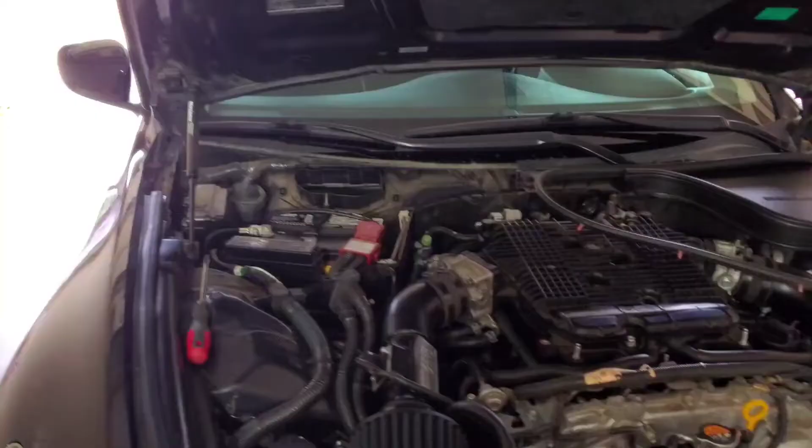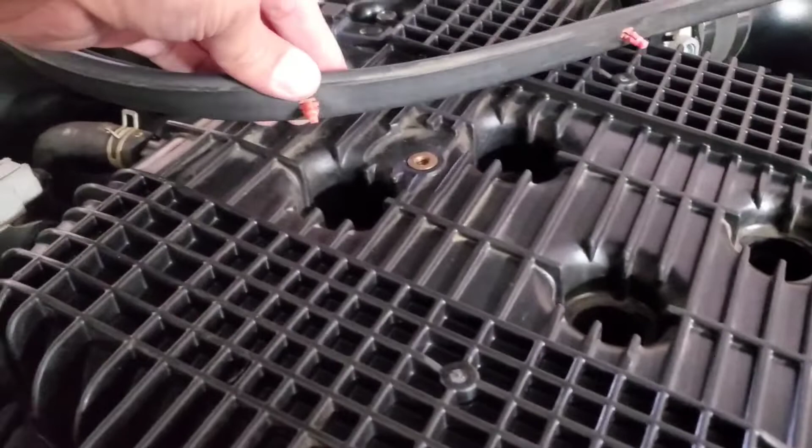All right, so basically I had to take this panel here off, right? And then the panel here that covers the battery. So this panel here that sits right over here over your cabin filter, it's held in by these clips. Just be a little careful when you take these out. They just come out one at a time. You can grab here and pull it out to get that off.

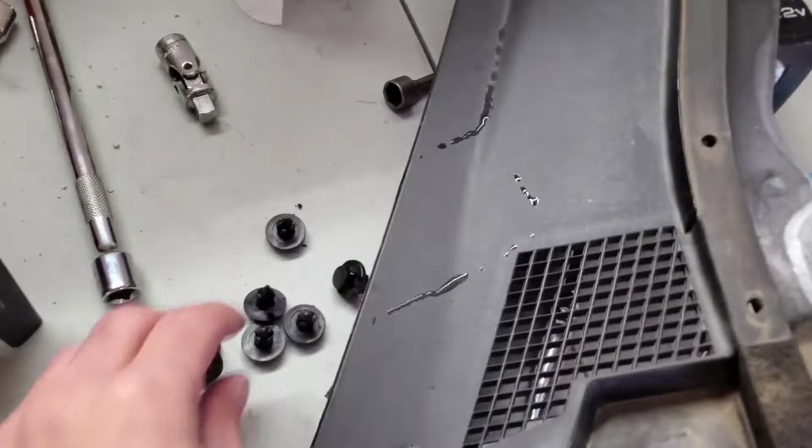And then that and the battery cover are held on by these fasteners. Real easy, just get a flathead under, pull them up, and then take them out. If you break any, no big deal, they're cheap. You can get a big bag like this on Amazon for like $5 or less.

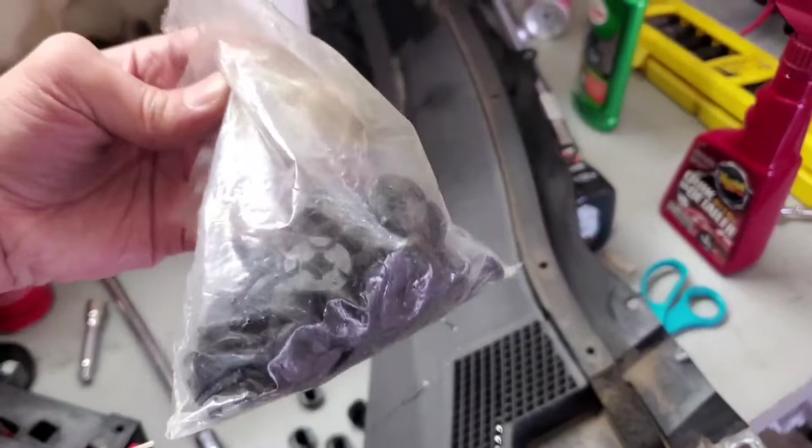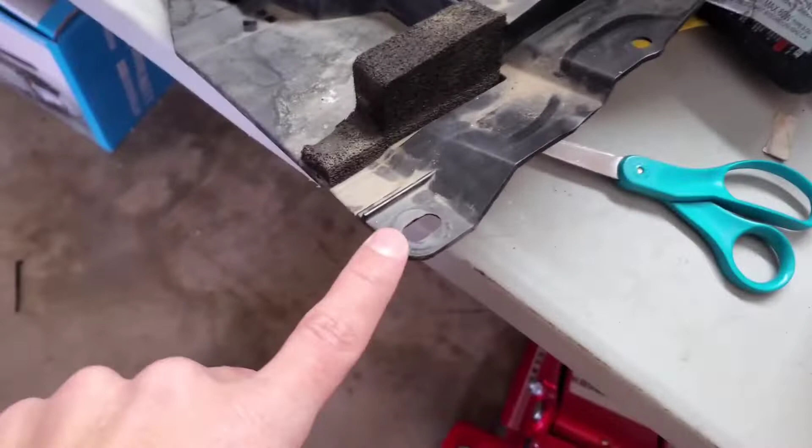So really handy stuff. So basically these are all the access points for that weather stripping that I just showed you, and then you've got a series of clip points where these clips go in. So you just pull them all out, and you can get that out, and then you can get the battery cover out as well in the same fashion.

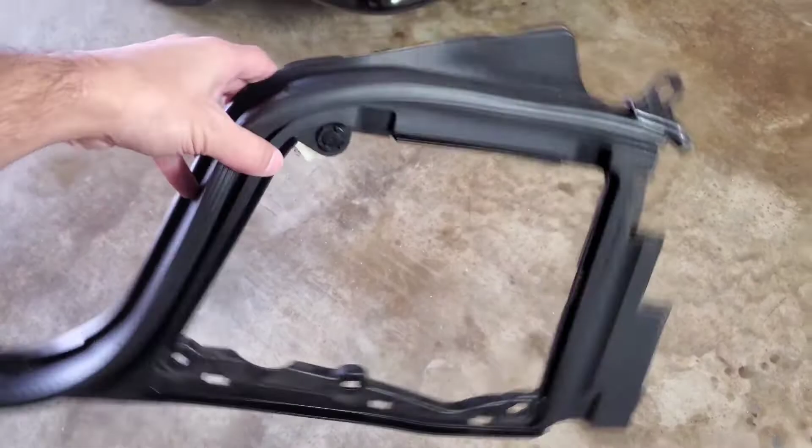No big deal. So once you're in the fuse box here, there are these 2 retainers, that guy and that guy, and it's sitting in here, and these retainers clip into these little squares. You press them down and pull it up. And once you do that, you can pull the fuse box out a little bit and get access to it. So I'm going to pull that out right now and remove the fuel pump fuse, and then we're going to drain the lines.

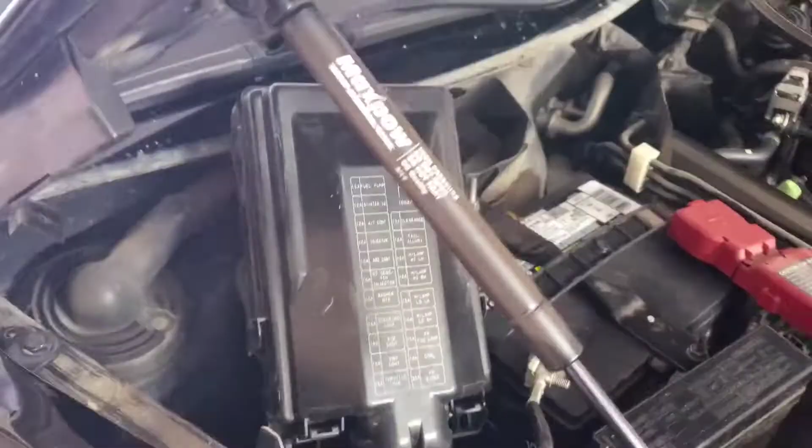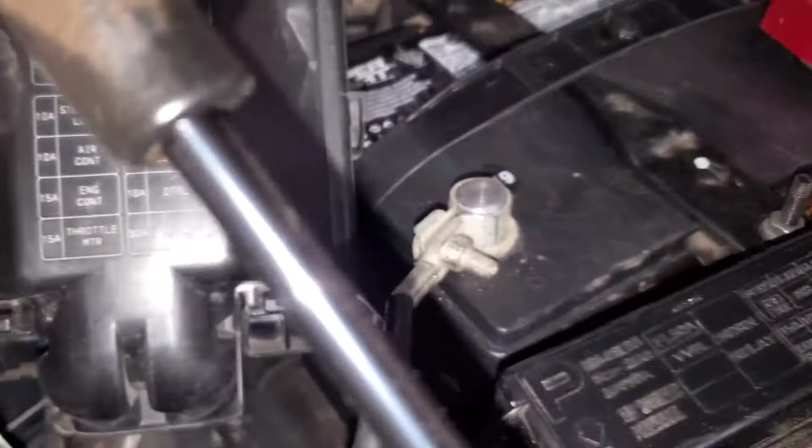Alright guys, so this box was a little difficult to get out. There's this wiring harness. I don't know if you can see it right there. That wiring harness right there basically is kind of tucked underneath this bracket here. So you just want to kind of finagle it out, and then you'll get access to your fuse box. There are 2 clips on the bottom, and then 1 clip up here on the top right there. So you want to get all of those off, and then you can pull this thing off.

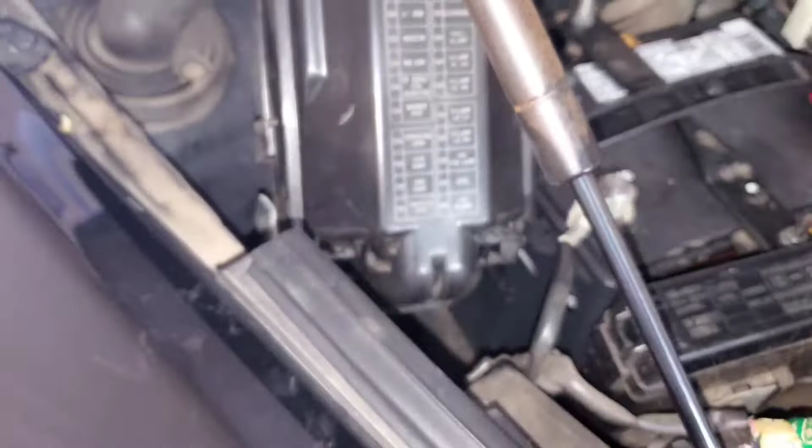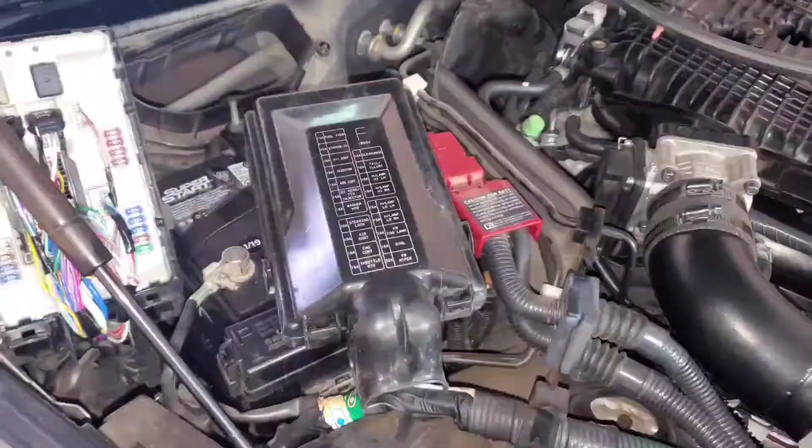So I'm going to go ahead and get that done right now, and then the fuse for the fuel pump is right there. Pretty easy spot, kind of a bitch to get to, but here we are. Alright, and there we go. We basically just pulled these 2 up, and then it came off that way. So there's no way you're going to get that done with this in the car. You might be able to, but not with the battery there. So I went ahead and did that.

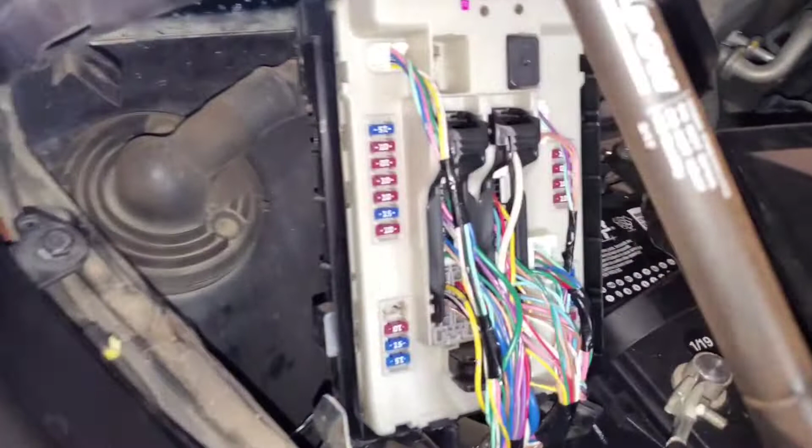And then the fuse we need to pull is this one. So I'm going to pull that, and then we're going to go try and start the car and kind of let the gas just run through the system without the fuel pump on. After that, we're going to remove the negative battery terminal and remove all power from the car so we can get access to the fuel pump. Alright, top fuse is out, and now we're going to attempt to start the car.

Alright, I think it's out. Yep, completely out of gas. So that's what we wanted. I'm basically gonna remove power now and push the car into the garage, get it situated, and it's just gonna be sitting here from here on out.

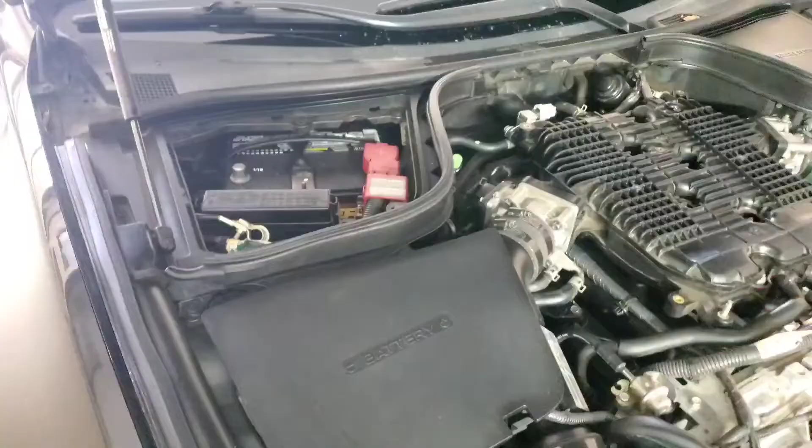So let's go ahead and get everything put back together, get the car rolled in, get the battery disconnected, and then I think we should be good to go. I shouldn't have any reason to access that fuse again from here on out. So I'm gonna get it in the garage, put it back together, and then yeah, 3, 2, 1, bam. All right. Battery's disconnected, everything's put back, we're good. We're gonna roll the car in now.

As you can tell, there's a lot of garage space to work with right now. We're gonna roll it in, and then I'm gonna work on getting that back seat out so we can get the old fuel pump out.

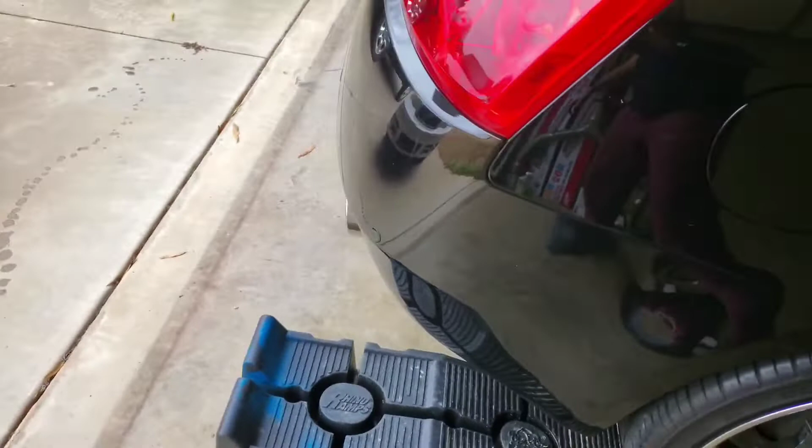Alright guys, car's in the garage. Wheels are chocked. We got just enough room for the garage to close. This is kind of what I wanted. I wanted maximum space in here because I'm going to have this door open. And then obviously when we're going to install the supercharger kit, it's going to sit right here. So I've got enough room to work right here.

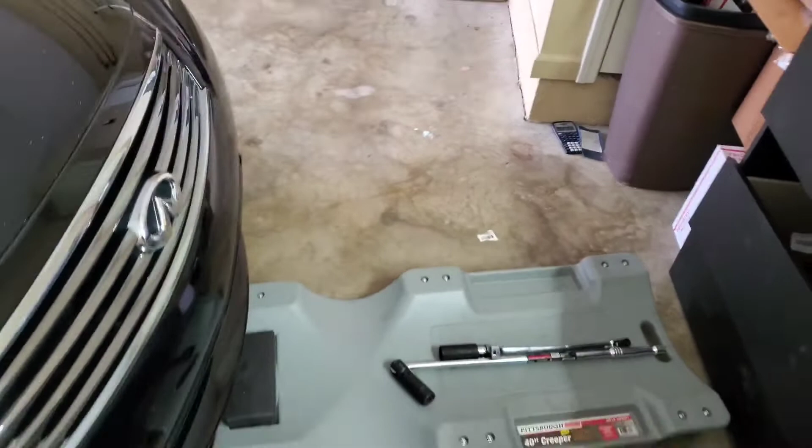And I know it doesn't look like a ton of room, but once it's jacked up, you'll be able to fit right there comfortably. We'll get the front bumper off and everything else, so should be plenty of room to work. We got tons of room over here, and this is where the car's going to sit probably for the next couple of months. Honestly, this project's not going to be quick. I've got a lot going on right now, but I'm happy to finally get started.

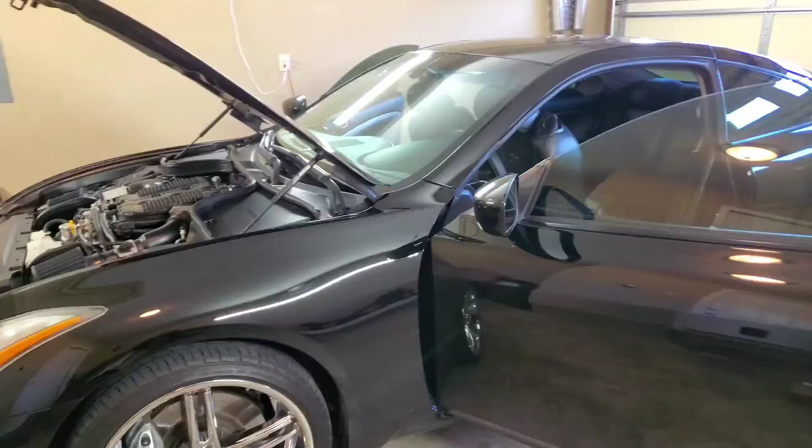So next thing, I'm going to get that back seat out. I'll try and film that for you guys, and then we'll take a look at the fuel pump area. I may not do it today, but it's irrelevant because it's going to be done in this video one way or another.

Alright you guys, back at it. New day. Got all my lights on. I actually made a mistake. Before I pulled the seats forward, I unplugged the battery, so I wasn't able to move these. So I had to plug the battery back in and get them moved. So now I'm going to get this seat out to access the fuel bucket and the fuel system. And I'm going to try my best to film that. So we'll kind of see how I need to posture the camera for that. And I'll attempt to get that out and we'll go from there.

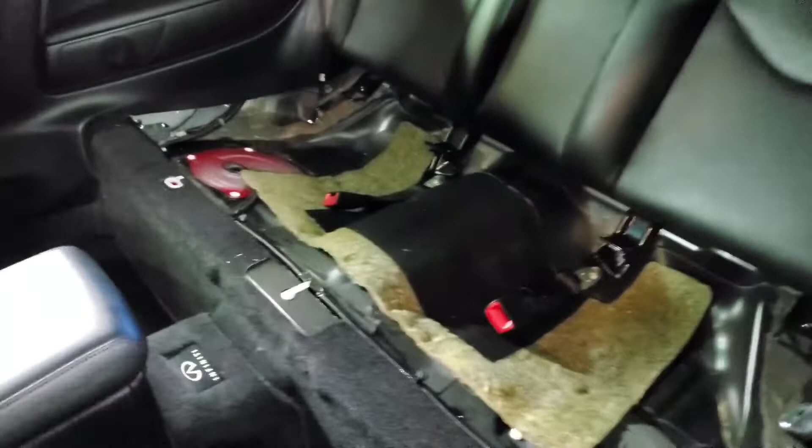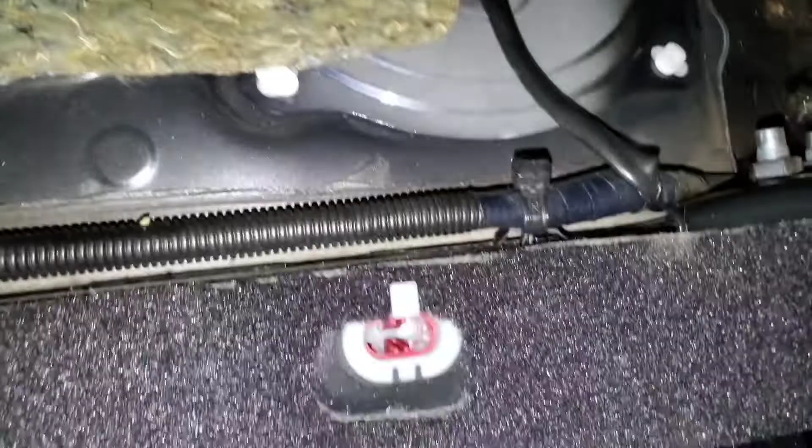Alright, so seat's out. I've got it right there for now. I may end up covering it with plastic or something just because I don't want any bugs to get in there. I like to take care of my stuff. So here's what we're looking at inside. Get a little privacy lamp. So these were the clips. As you can see, nothing's broken. There's no real way to undo them without just pulling on it.

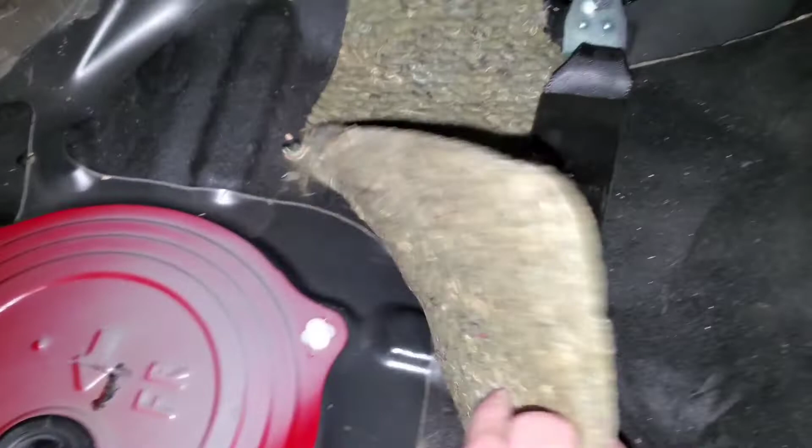So the fuel pump's going to be here, passenger side, and the access point should be pretty straightforward. It looks like we're going to basically align these little slots, pull this top hat off. Underneath we'll have the wiring harness, and we'll get the actual harness. So we're going to get under here and we'll take a look at what that looks like. I'm kind of curious why this is red, because the car is black. You can tell it's been painted red, but I guess that's to identify what's there. Anyways, alright, I'm going to get into this and we'll show you what's next.

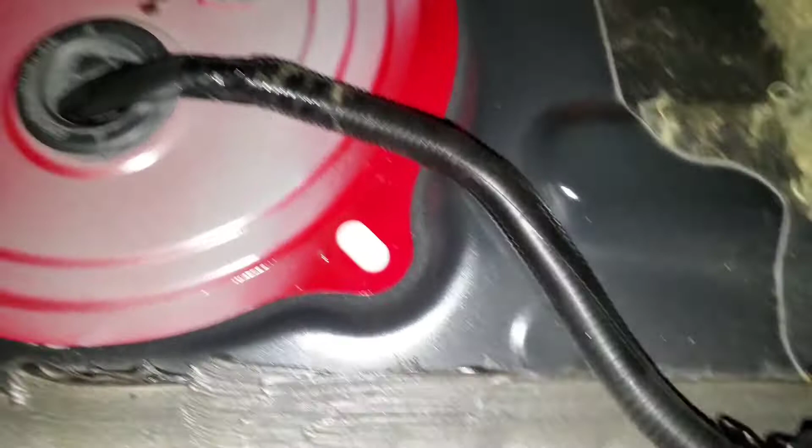Alright, so each of these clips are Phillips head. You want to be careful with this brittle plastic, so I used a larger size Phillips head screwdriver. And you turn them as if you're tightening. So it's a little counterintuitive, but you want to righty-tighty them and get them all lined up. And then this should pop out.

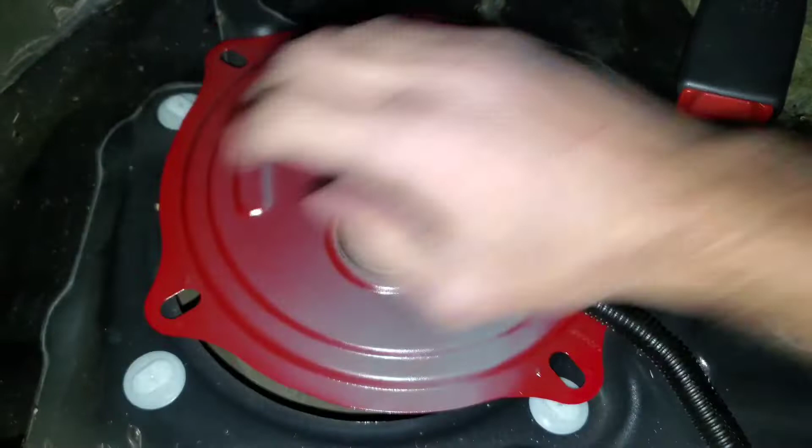And there is the fuel bucket, or the fuel hat to the bucket. There's the fuel line right here. And this is the harness. So I'm going to get this unplugged. So this harness goes up through here, through the lid. I'm going to get it unplugged, move this out of the way, and then we'll have access to the fuel system here. I'm going to clean this area before I even open it up, but this is your fuel tank. Again, I'm on the passenger side.

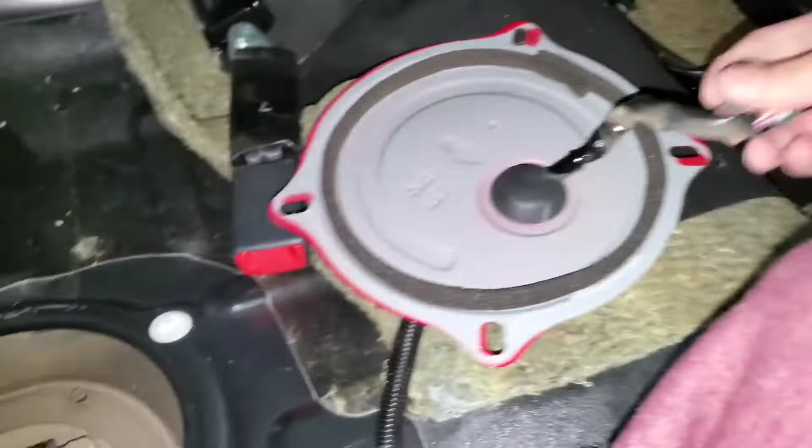So let me get this clip undone here. It should be pretty straightforward. Yep, here we go. That is out of the way. And now we have access here. I did already depressurize the system. You guys saw that earlier. So this should come off, maybe have a small amount of drips, nothing major. But I'm going to clean the area first. So let me get that done and I'll be right back with you.

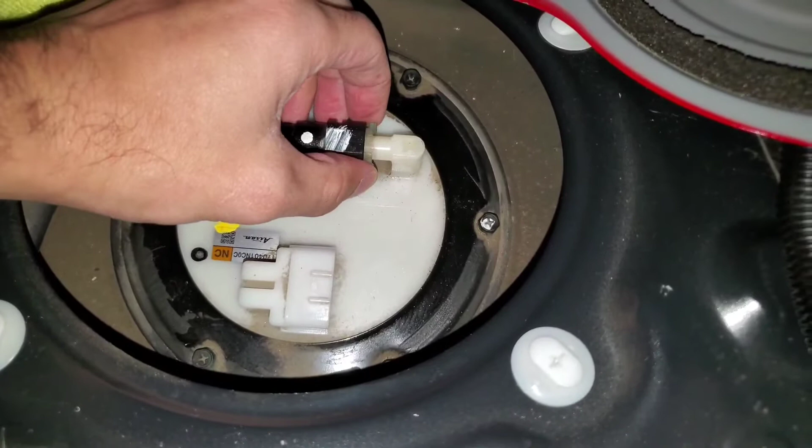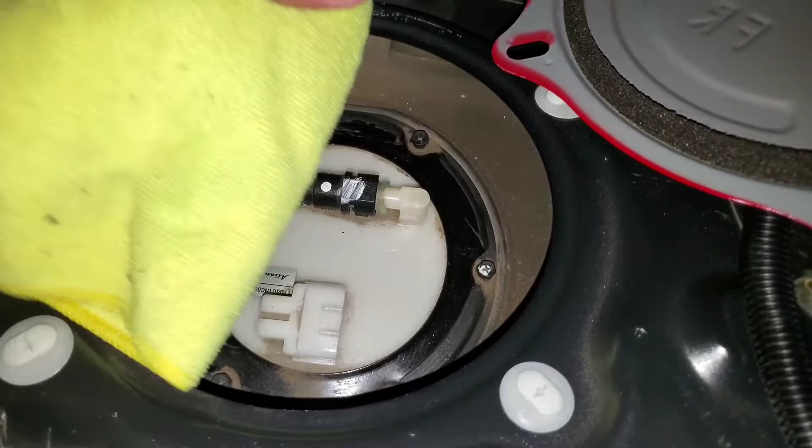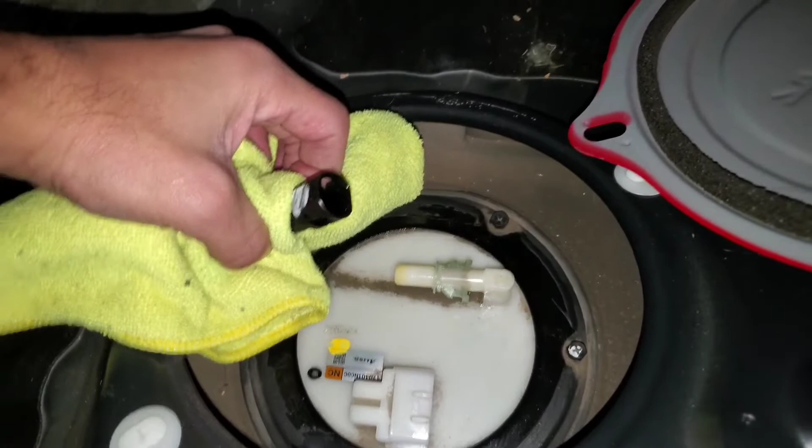It's manageable, but if this stuff sprays everywhere, you're gonna have a bigger problem on your hands. So let me go ahead and get this area prepped, and we're gonna take off these. Looks like Phillips head bolts that hold this retainer on, and we'll be right back to do that. I'm gonna cover this up in the meantime to avoid fumes getting everywhere.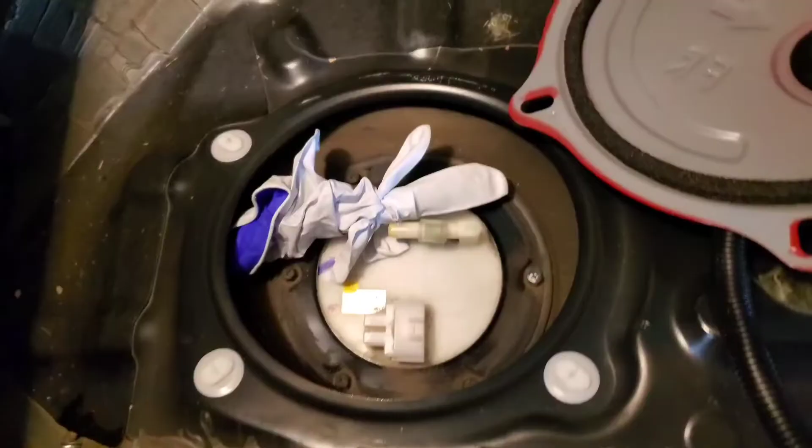All right, guys. So I got a little work light in here, just to make things a little bit easier. I used a glove to basically keep all the fumes from getting out into the car, so I should be fine there. It wasn't too bad, but these are number 9, and I'm basically just going to take these all off, and then we should have access to the bucket.

I don't know if I'm going to tackle that just yet, but I kind of want to get access and take a look at what I'm working with. So I'm going to go ahead and loosen everything up and take a look, and I'll be right back with you to show you what that looks like.

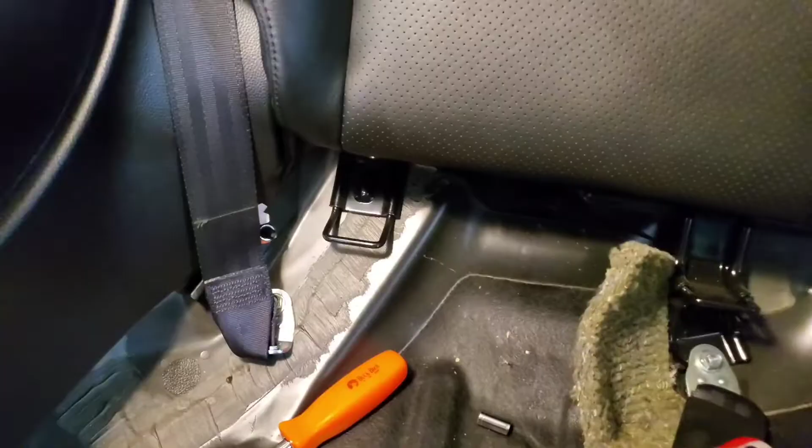All right, I actually lied. 9 was a bit too big, so right now I'm using, I believe this is a 5 or an 8. Oh, so I was using a 9. I'm sorry. So 9 was too big. I'm using an 8. An 8 got these loose, and then I just finish it off with a screwdriver. I'm going to go grab my magnetic tray to keep all this stuff. Anyway, let me get this apart, pull the bucket out, and we'll take a look at it.

So now we've reached a point where this is coming up, and there's a little sensor in here, like a leg, a float that goes up and down to tell you how much gas you have. So we've got to get it out in such a way so that is not getting caught on anything. If you feel resistance here, you need to stop and reevaluate what you're doing. I'm not sure if I can capture this while I'm recording, so I may just pull it out and go from there.

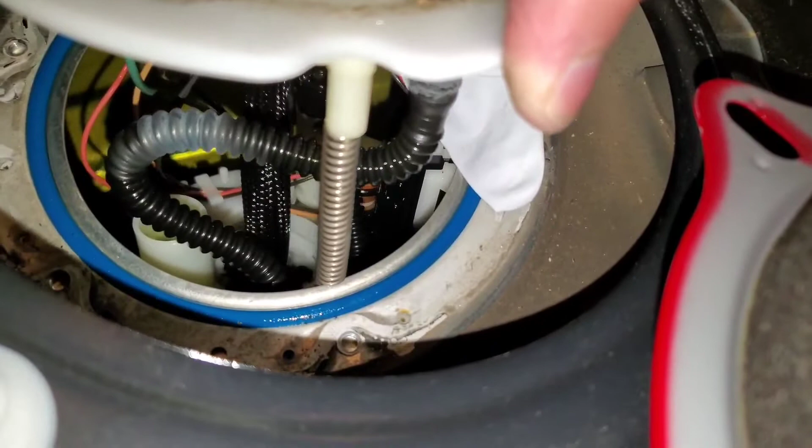Also, there's a little O-ring right here, you guys. That needs to be taken off and rinsed and then set out. You can't let that get soaked with gas, or it might make the O-ring swollen, and then you won't be able to get it back on. So there's a little assembly there. Here's everything we're trying to get out.

Most of the gas is gone, but there's still a good amount of gas in that tank. Wow. This goes to show you when it says you're on empty, you're really not. I was on E for a while, and it looks like I'm not sure where that lever is. Let me get this out, you guys, and then I'll show you what's next.

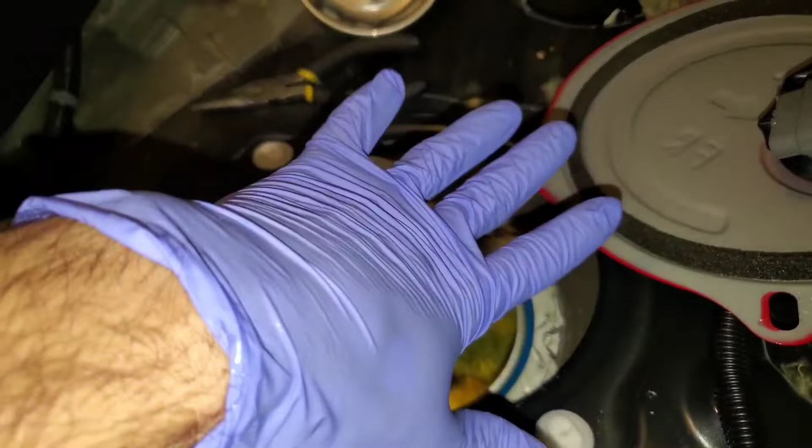Alright, it was a little more difficult than I thought it would be. Make sure you wear gloves, guys. I didn't wear gloves, and by the time I got it all out, I had gas all over my hands. I had to pour gas outside, because obviously I couldn't really do much in here. So there's this one hose right there that connects to the side of the basket. I'll show you where that connects. You gotta get that unplugged before you can pull it out.

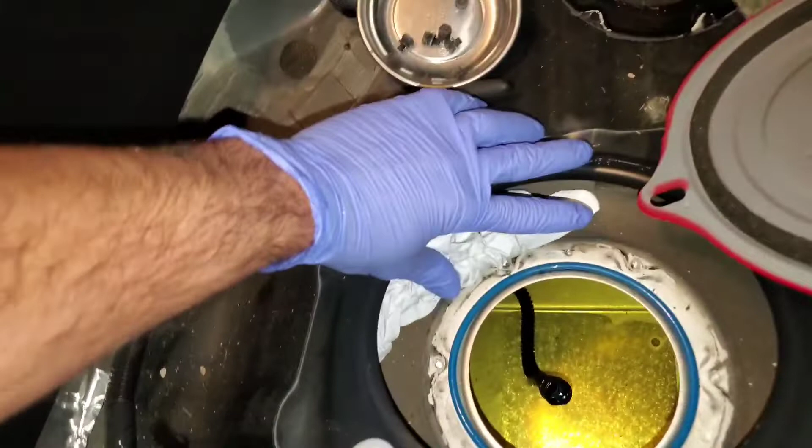Once that's unplugged, you kind of have to pull it out, and when you hit that little empty or full lever or sensor, you have to kind of angle it to the side and pull it up and out. So if you feel resistance, try and work it back down and then move it back out. I would have showed you guys an actual rundown of that if I could have, but I'm just a solo filmer here, so I couldn't do it.

This is the O-ring I was talking about. I'm going to go inside and wash this off. I don't want this to swell. We want this to be able to put everything back together when we're done. So now that we're done in here, still a good amount of gas in there for being on empty.

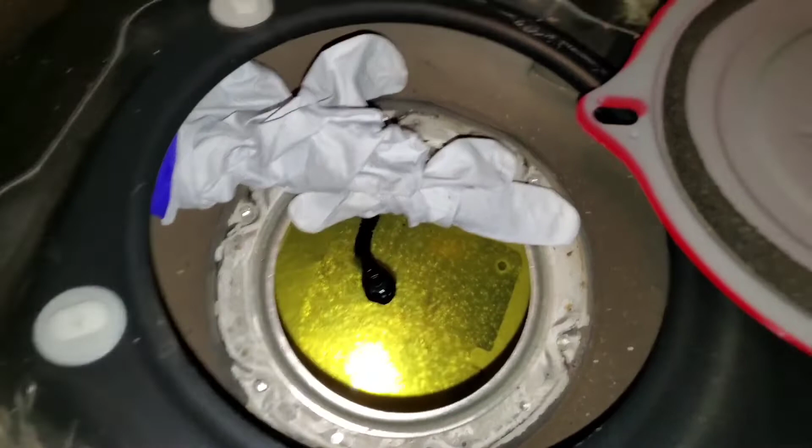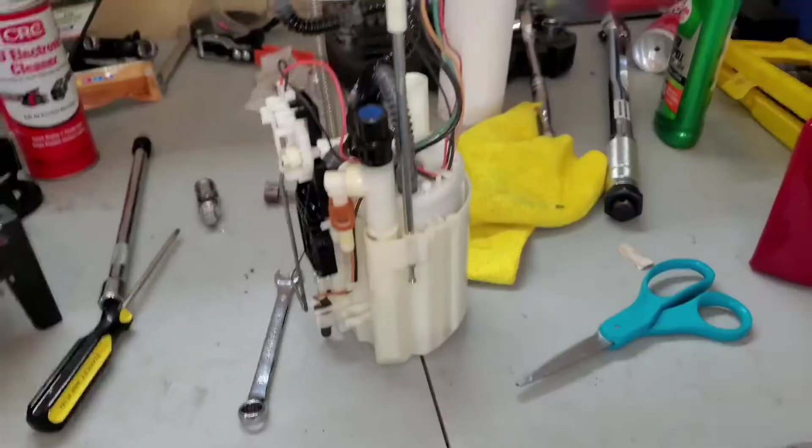But now that we're done in here, I'm going to put this lid back on and just try and keep the fumes from getting into the cabin of the car. Obviously the garage is going to get fumes, so I may do something to cover this up, but I'll get there in just a few. Alright, so here's the fuel basket that we pulled out. That connection that I was talking about was connected right here.

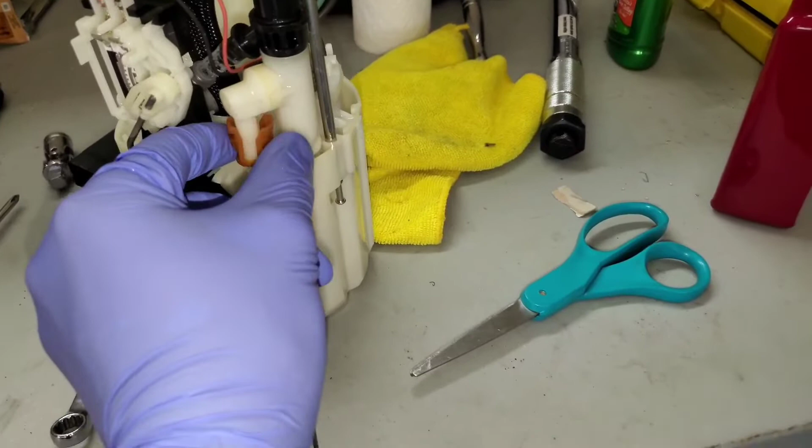And to get that out, you have to depress these two clips like that, and then the hose that's in the tank comes out. Then I took it out by pulling it up, and then when I felt resistance, I tilted it to the side to pull this lever out as well. So we're done. This is the assembly here. This is what it looks like.

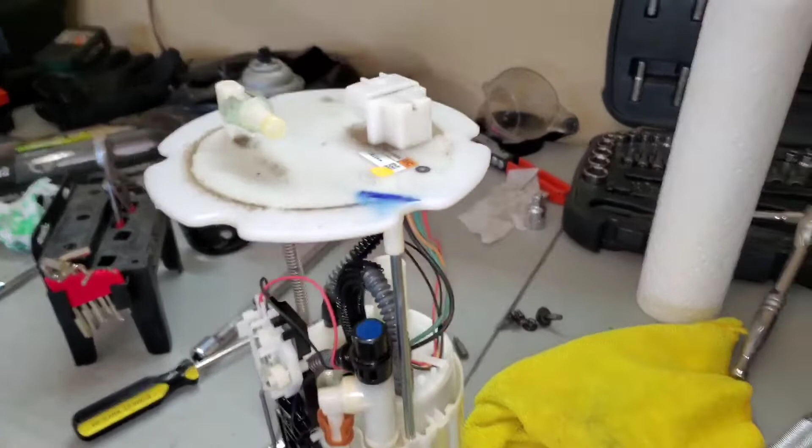I'm in a 2012 G37 coupe. So next thing is kind of working on the fuel pump system, getting that all done. So I'm going to reseal the car, and then we'll take a look at this. But first I got to clean this area up. So 3, 2, 1, boom. All right, so we're cleaned up now.

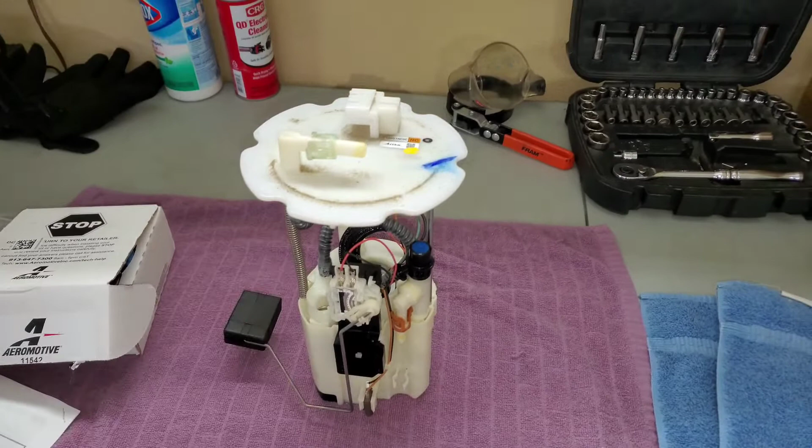I've got basically the car sealed up for the most part. The gas tank is still open, but I've got it somewhat sealed. So the garage smells like gas, but there's no fumes getting into the car. It's been like that for about a day. I put everything on hold just because I need to understand this more. But I did reference some peers of mine and look at the materials that came with the CJ Motorsports return system. And kind of got a good idea of what I need to do to get this guy done.

So I'm going to kind of break it into two parts. I'm going to get the new fuel pump installed, which is this guy right here. It's an Aeromotive 340. And after I get that installed, then we'll do the return system. But first I want to get the pump installed. So the car may be like this for a week or so.

We're about a week away from Christmas, so I need to get this done, make sure the fuel pump is installed properly, and then I'll work on getting into the top hat and then doing the return system through the entire vehicle. Once that's all said and done, then I'll put it back together. We'll check for leaks and we'll go from there. But this is not going to be an easy task. I've never done anything like this before.

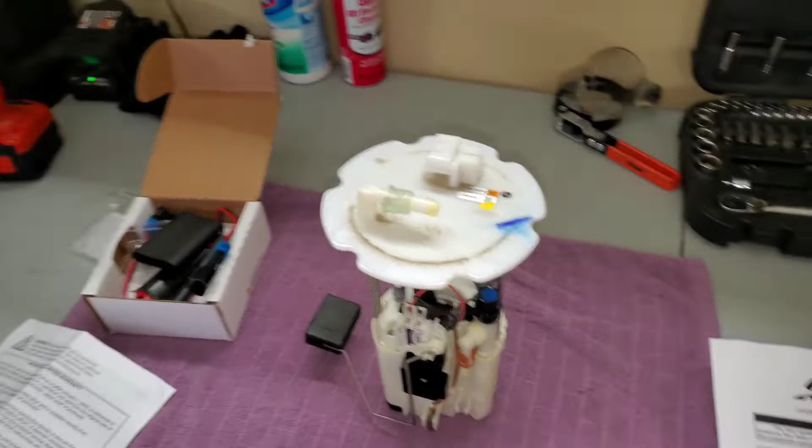So this is probably going to be kind of a montage over the course of a few weeks to make this complete video available for you guys. So bear with me. Obviously you don't know that because you're watching the video, but here we go.

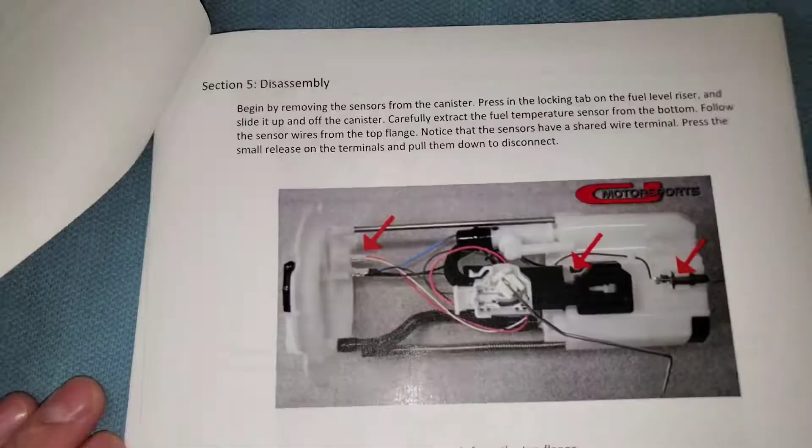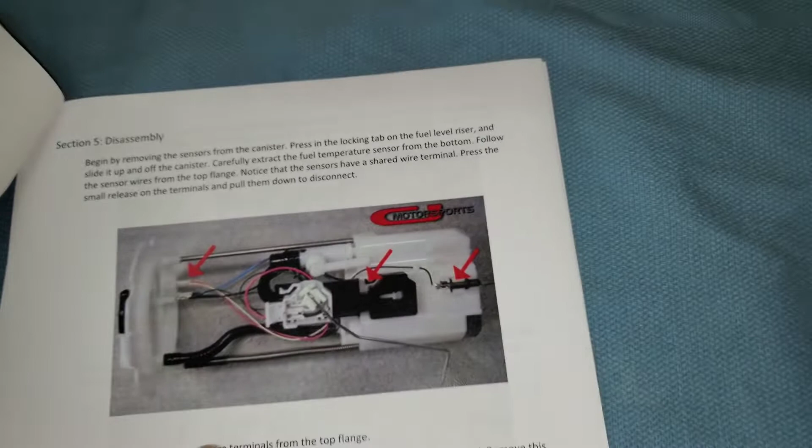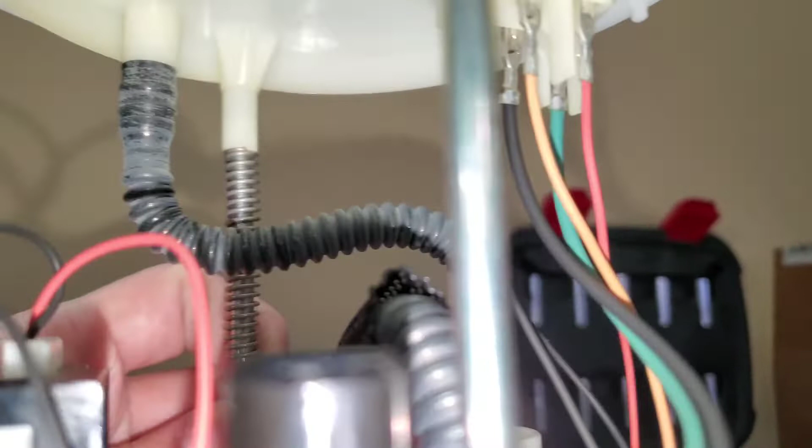First things first, it says we need to start disassembly. We're going to remove the sensors from the canister, fuel level riser. Okay, so we're going to go ahead and get these sensors out. We're going to get some of these plugs undone, and we'll get the top hat off. So I need to make sure I have a good idea of what wire goes to what. And we'll go ahead and document those now, and then reference them later when we need to.

It looks like the fuel pump itself is blue-green, or I'm sorry, green-black, and these are actually pretty thick gauge wires. These are the same gauge thickness as the new fuel pump. So green and black, and they go right here. This looks like it goes to the sensor, the temperature sensor, and the lift, the level float.

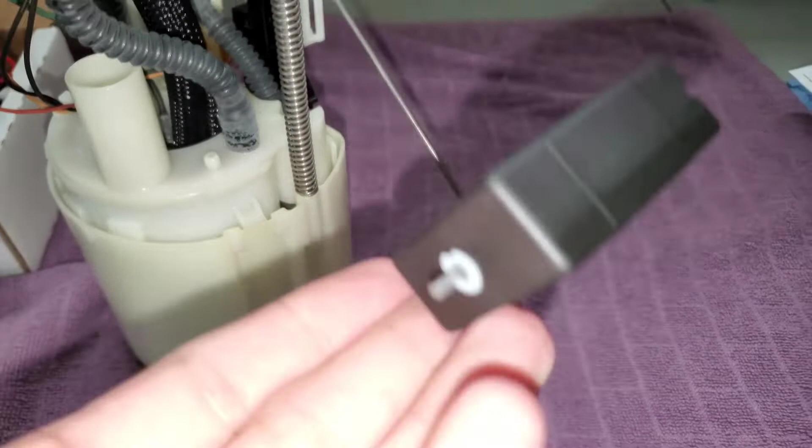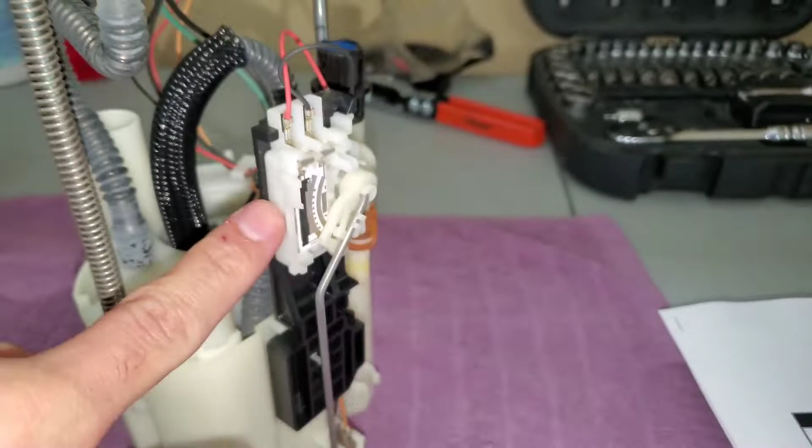And then we've got a red and an orange here. And those are... Okay, so red goes here to the lift, the volume sensor, and then orange goes down here to the temperature sensor. So let's get this stuff off, and then we'll zoom into the next clip. But I'm going to do this off camera because I'm only one-handed here. So I'm going to get this part done, and then we'll be right back with you.

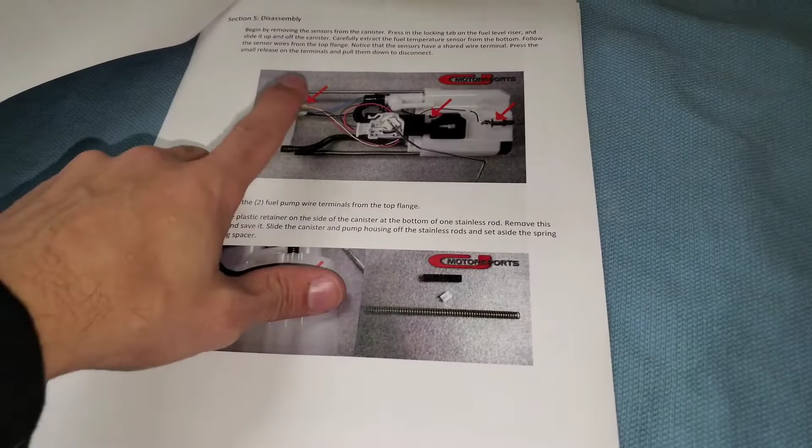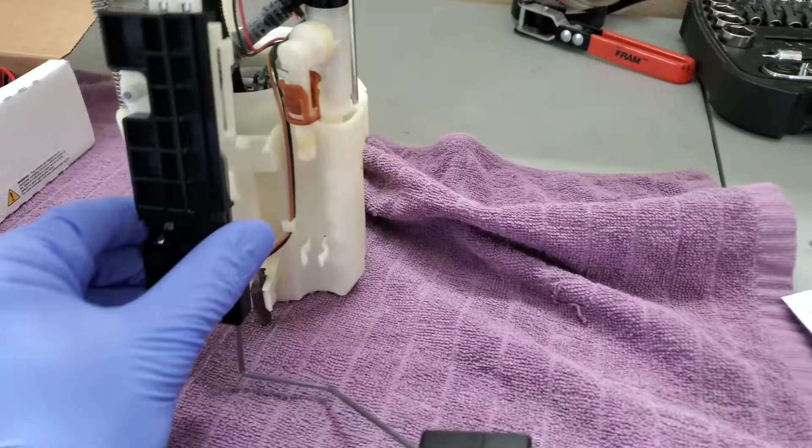Oh, and just so we're all on the same page, this is a fuel level riser, guys. I've been calling it the wrong thing forever, whatever, but we're going to get into taking all this off right now. We got the fuel level riser off. It basically hung on right here. Well, the other way around. Basically hung on right here, and then it clipped in right there. So it goes up and clips, and then you release the clip here, and then it slides up and off.

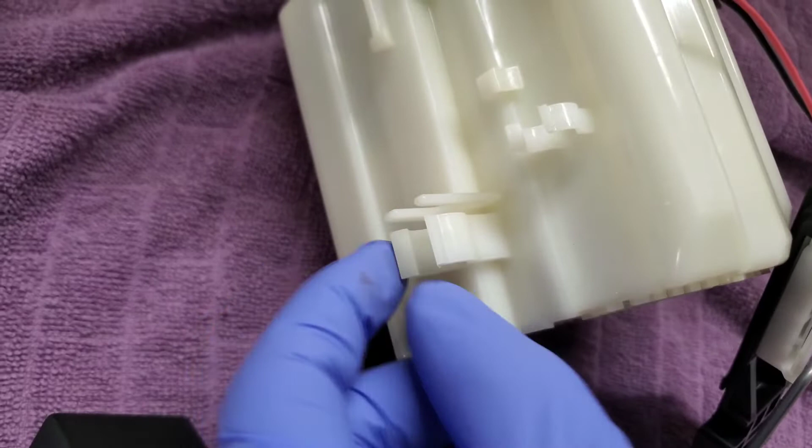So that's that. We're going to get this sensor off, then we're going to follow these wires back, respectively, and then unhook them from the top hat. Here's another view. I've got that thing off. That just came off from here. I tried to be careful with this. It's malleable for the most part, but it'll pop right out. Then the wires were held together right here, came up and around through here, and then up.

So this is what I'm looking at. So on the side where I've got two prongs, it's orange on the left, red on the right, and then the double ground wire here, which is the farthest to the left, black. Those all need to come out so that I can pull these pieces off the assembly itself. I believe they'll just pull off, but I'm going to use two hands, and I'll be right back with you.

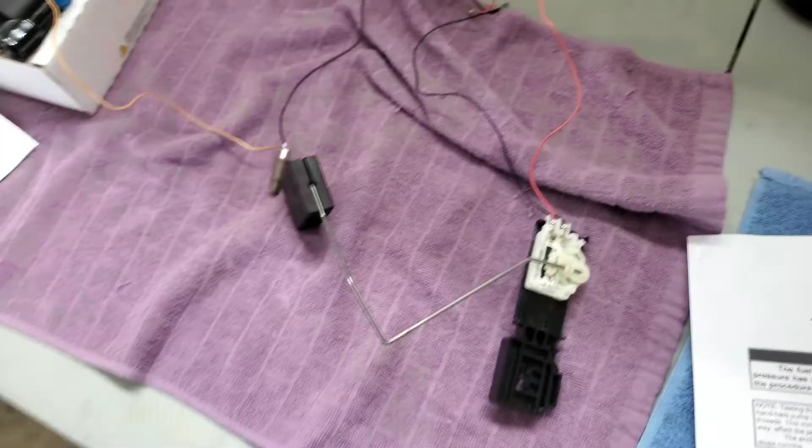Alright, so I got all these off. Make sure you press the small release here. You see that little tab right there?

Background is killing me here.

There's a little tab. You see that thing? You push that in, and that'll release the terminal. So I don't believe there's any manipulation that has to be done when you put it back on.

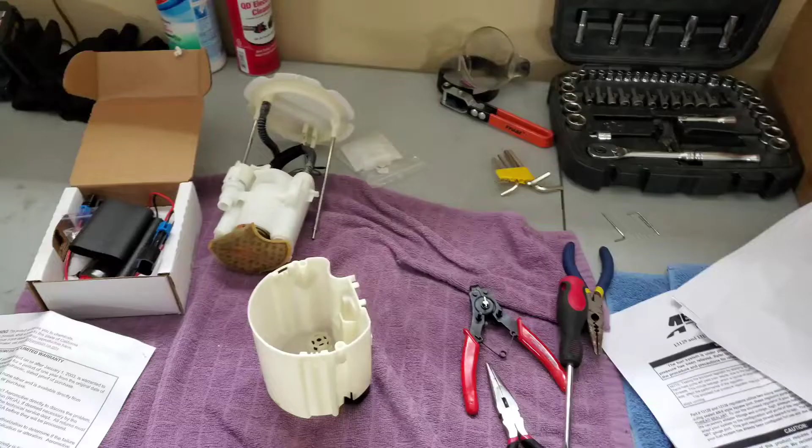You guys, I know I haven't filmed this whole process, but it was a little challenging. To get this little retainer off here, I actually had to kind of pry it back a little bit, and then I stuck a nail in between this retainer and the actual rail itself there. And the size of the nail is right there. So this little nail got behind this thing in order to get this clip off, and it took me forever because I didn't want it to break.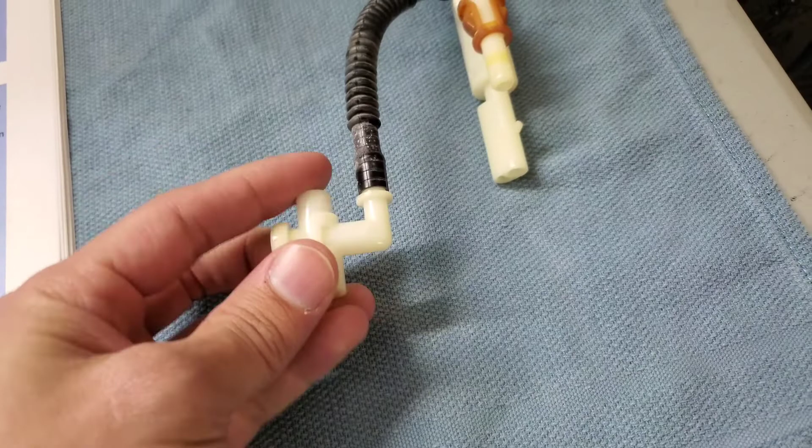So I got that off. I've got the spring off. I removed this piece. So this piece kind of goes right underneath the fuel pressure regulator. I kind of rocked it back and forth and it came loose. And then this was clipped right there. You can see that little retainer right there that gets clipped on that piece right there. So that came out. I got this out, and then I've got this assembly.

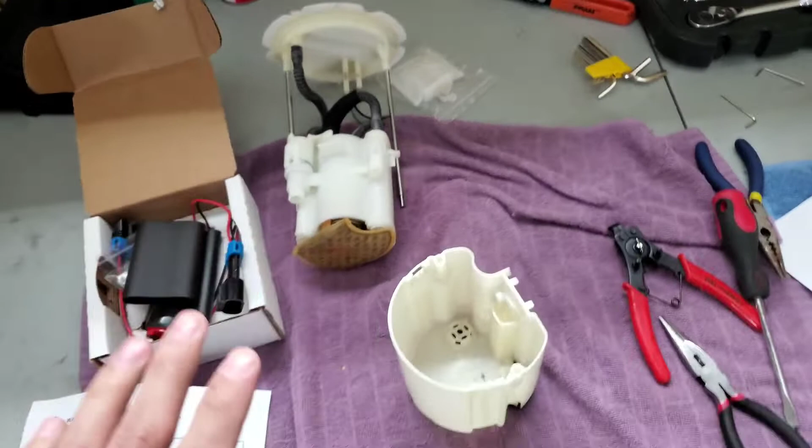So I'm going to stop everything right here. I'm going to have to come back to this another day. I'm running out of time, but this is kind of where everything is right now. So I'm going to put some pieces upside down that I don't want to get contaminated with anything. I'm going to leave this there.

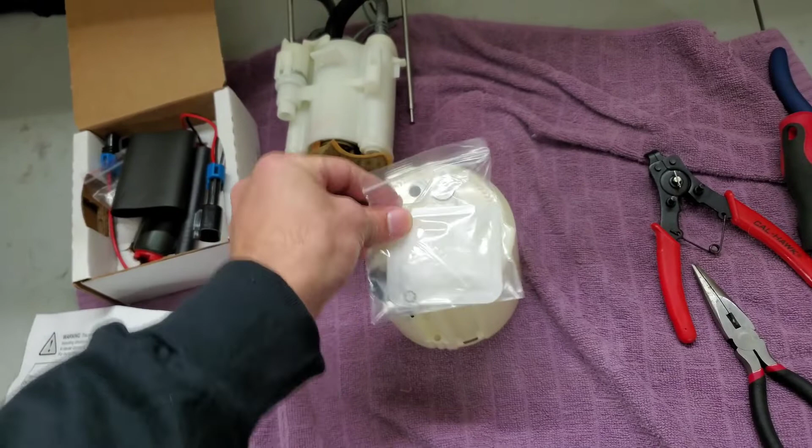We are going to reuse this strainer on this pump because the one they provided is not going to fit. It will, but not where the pump sits, because the pump's going to sit right in the middle. So there's not enough room, and this thing, you just can't really manipulate it too much. So we're probably not going to use that. So anyways, this is where it's going to be.

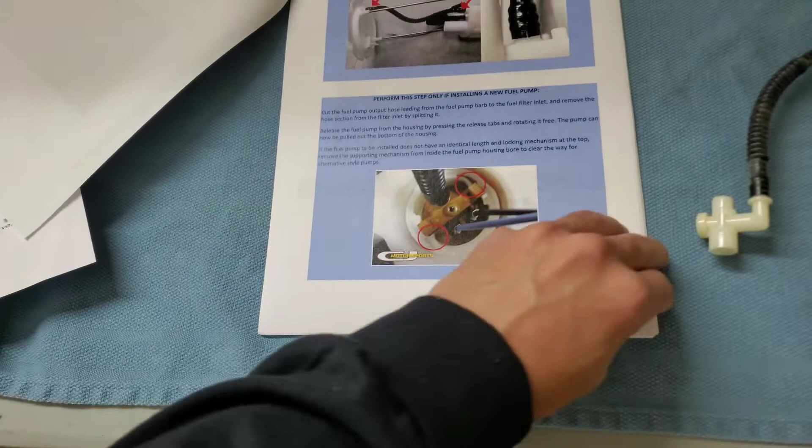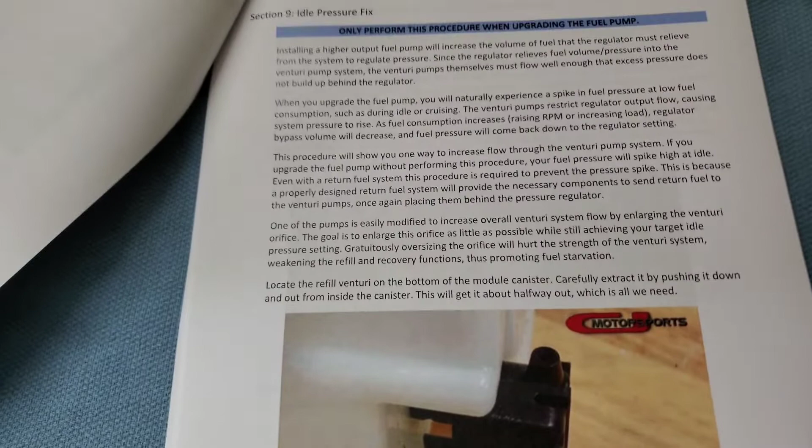It looks like some of the next steps are pulling out the old fuel pump and I think modifying the basket, which I need to get a tool for. I need to get a Dremel. And I need to get some drill bits because we need to drill out the Venturi size there. Yeah, so the idle pressure fix, we've got to basically make this hole bigger, and I'll need some drill bits for that. There it is right there. No big deal. And then this thing.

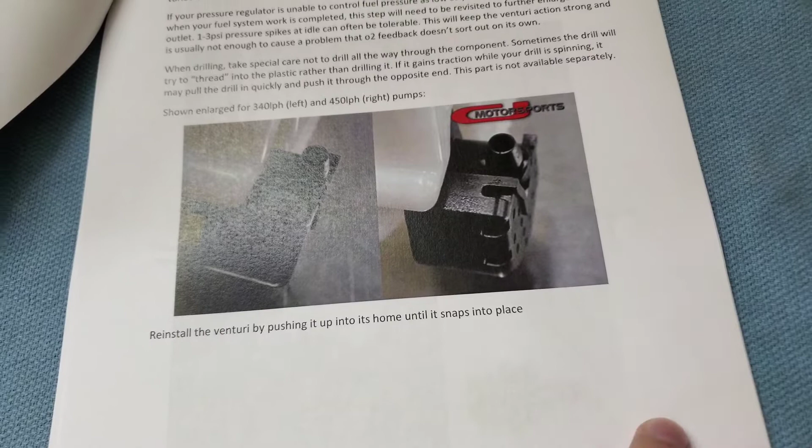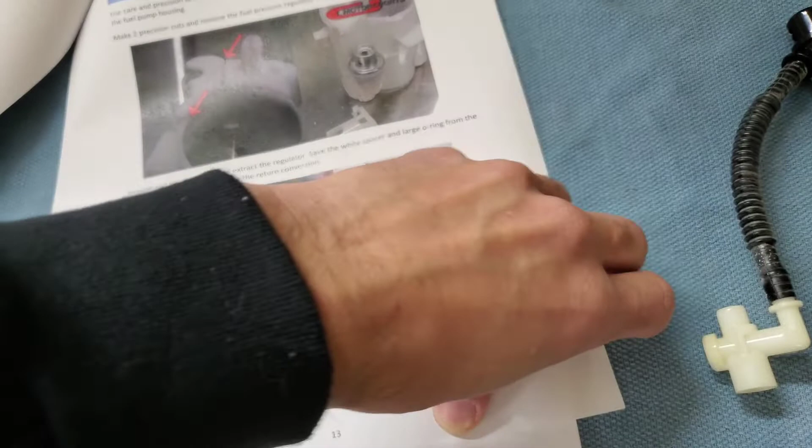So I need to make some cuts here. I need to get this thing out, and we're going to bypass it altogether because we're going to be putting an external fuel pressure regulator on the vehicle, which is right there. So anyways, I'm just going to stop it right here. We'll pick up soon, and you guys obviously won't be able to tell the difference, but I've got to put it on hold for now. This is going to take more than I'm willing to do right this moment, but we'll be back and you'll see this again.

Hey guys, so I'm just going to stop this video now and make this part one. I feel bad about not really detailing how I got the fuel pump to where it's at right now. But basically where the video cut out, I was pushing those tabs to get those connections off, and then I got all those off, and then I kind of further disassembled the fuel pump housing, and it's not done. The fuel pump's still in the housing, but before I tear into it any further, I kind of want to get some tools together.

So Christmas is coming. There's going to be a couple of other things that happen before I can get to work again. So I'm just going to leave it right here. This will be part one. It's all pretty basic, guys.